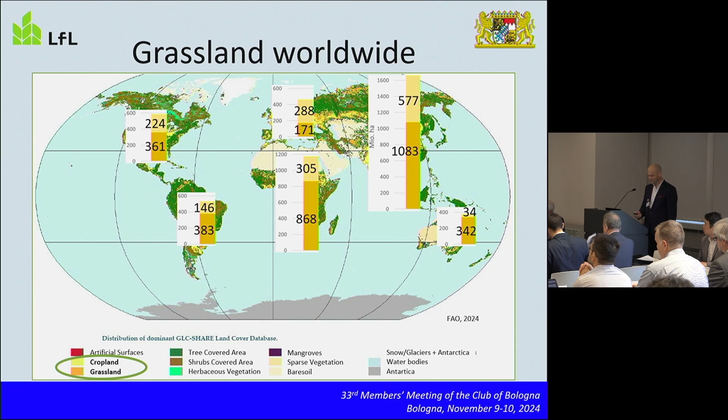So how was the development of grassland during the last two decades, since 2001? Generally, agricultural land area is shrinking. We have at the moment nearly 37% of agricultural land area on our planet, and it was shrinking during the last two decades by nearly 2%. When we look at cropland, we see it was the other way around - we gained cropland worldwide. We are up to one third of the agriculturally used area in the world being cropland.

Especially in Africa and also South America, we saw an area expansion due to deforestation, so cropland grew during the last two decades by more than 5%. And what happened to grassland? Well, it declined, it was shrinking during the last two decades. At the moment we are only at 67% of grassland. I've always got in my mind the number of 70% of the land area being grassland, so we are already going down by minus 3.5% during the last two decades.

There is also an area on the cropland that we manage grassland-like: temporary meadows and pastures. That area is quite high, 8.7% of the cropland, but it was shrinking during the last two decades by minus 3%, mainly in Northern America, Europe, and Asia. So we're driving out these temporary meadows and pastures from the cropland.

If we calculate the grassland area together with this temporary grassland-like area, we come up to three-quarters of the agriculturally used land in the world that is grassland-like. So it's actually the biggest crop that we use on our planet.

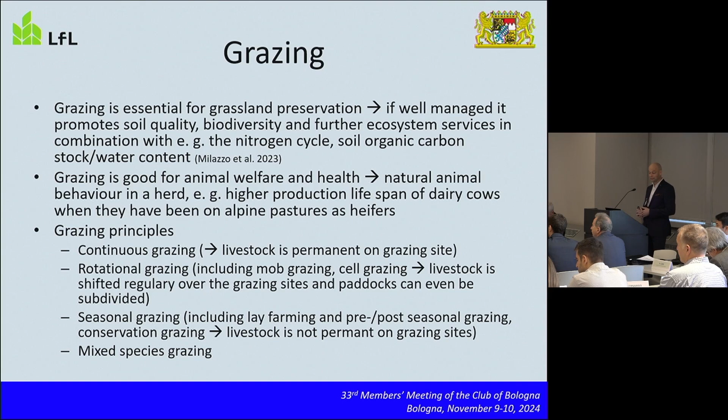Besides that, there is some seasonal grazing. I've already mentioned that there are times when grass doesn't grow, but it also includes lay farming or pre-seasonal grazing, and post-seasonal grazing or conservation grazing, so the livestock is also not permanent on the grazing sites. What we can also do is mixed species grazing, using horses, cattle, sheep, and so on. They use the grass sward in a different way, and that brings up more heterogeneity and more biodiversity.

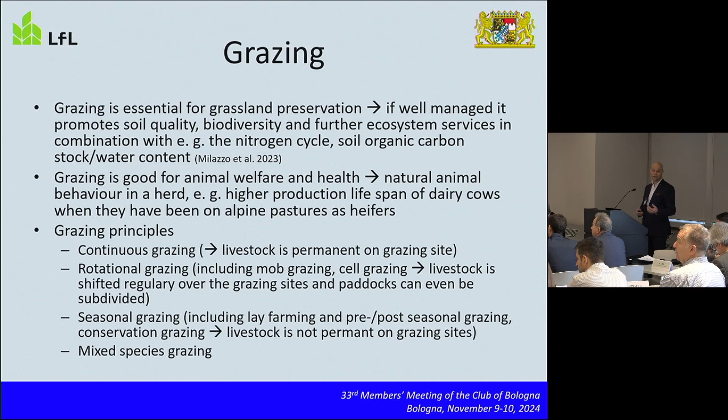What about data in grazing? Most of it is manual recording up to date. To measure the growth, the regrowth, and also the residuals after grazing, we have to go out there and do it by hand. There's not that much automated yet. We use a plate meter, but you still have to walk over the area. The management itself is also most of the times without any digital assistance, and no decision support systems are in place here. There are only local solutions used by farmers, but most of it is really manual. Farm management information systems are totally missing when it comes to grazing.

Worldwide, I would say. A few systems are already in use. We have some livestock tracking systems and geofencing systems like from Norway or Austria, but that's on the market somewhere, not even in use in Central Europe, for example. There is hardly any further data like on animal behavior or estrus detection like farmers are used to in the barn. They have a lot of sensors in the barn, but they cannot use it on the pasture at the moment. So when they go out on the pasture, it's more or less a black box for the farmer, and he doesn't know what the cattle are eating and so on.

I think what's changing the game is the virtual fencing systems that are coming into the market right now. We have four companies, NoFence, eShepherd, Vence, and Halter, that are producing these systems and have them on the market already. There are more than 250,000 systems already on cattle in practical farming, and most of them are suited for cattle, but NoFence is also for sheep and goats, they say. I think this is really a game changer when it comes to grazing, and we will find a lot of new ways of grazing in future, in my opinion.

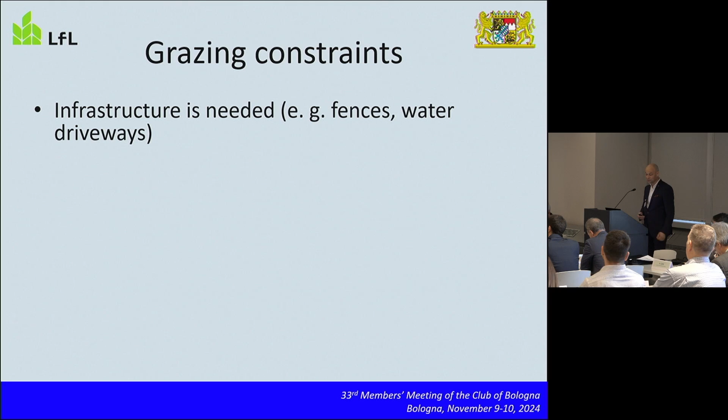What are constraints in grazing? Well, of course, first of all, you need the infrastructure. You need a fence, you need water troughs, you need driveways for your cattle. So that's an investment before you start.

Then, of course, you have the seasonal differences in growth and also quality of your sward. That means when you feed a dairy cow, your daily milk yield will change with the grass growth and the grass quality, and even your milk bulk contents will change. The feed intake of the animal is unknown to the farmer, so he doesn't know what the dairy cow was eating out there on the grassland. He doesn't know, do I have to supplement the cow in the barn? Is concentrate enough, or do I need even some more feed stuff? That's a really big thing where the farmer has to have good skills in order to get it right.

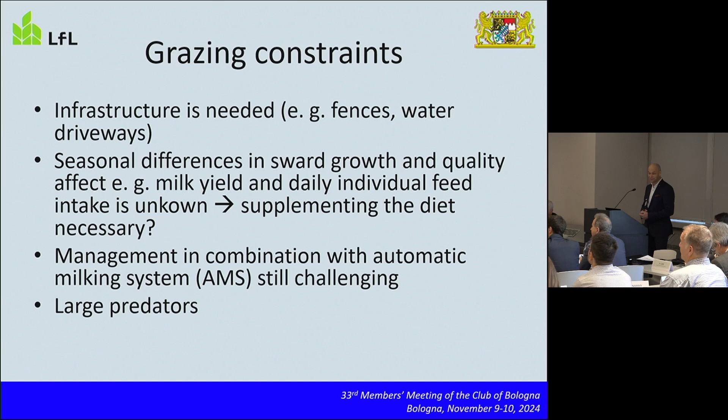We also have a lot of automatic milking systems out in the dairy farms, and still it is quite challenging, this combination of grazing and automatic milking systems. We have other problems like with large predators. That's a big topic at the moment in Europe, that we have the wolf back, and that threatens our grazing animals.

And of course, there is overgrazing all around the world on certain spots, and this leads to a loss of grassland, to a loss of biodiversity, and also to higher greenhouse gas emissions, like the situation we have in Mongolia, where they overgraze their land, and then the permafrost starts thawing, and methane is going out into the atmosphere. So this was about grazing.

Next, I would like to show some things about harvesting. The first thing on grassland is that we have not only one harvest, we have several harvests through a year. So 1st, 2nd, 3rd, and 4th cut, for example. And we can use it in different ways. We either use it as fresh biomass, directly fed to the animals, but most of the time we conserve it as silage or hay, and all in between. So there are different things between silage and hay you can actually make out of grass.

And it can also be combined, harvesting grassland sites and grazing them at certain times. So it's a big, differentiated use of this grassland. I just want to show here one example of a farmer. In the first cut, he says, well, I need this grass silage for the winter, so I bring it into my bunker silo.

So I do the wildlife rescue measures with a drone and a thermal camera. Then I come with my disc mower for mowing. Maybe I have to ted depending on the weather conditions, but then there is definitely the rotary rake to swath it. And I use the forage harvester for harvesting. So that would be the first cut.

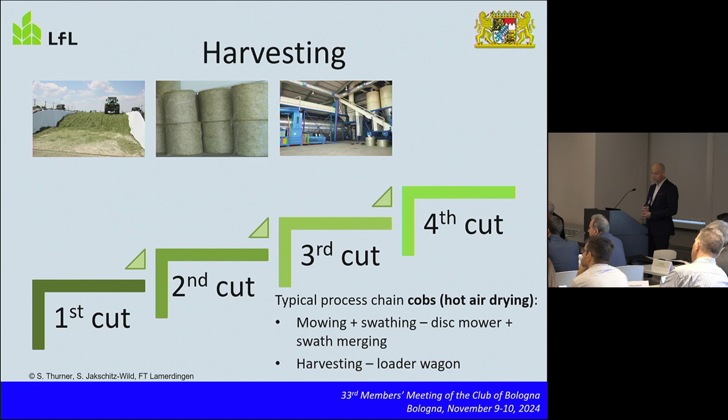And then in the third cut, he's happy to be in a region where there is a hot air drying plant. He produces cobs more as a concentrate feed also. The contractor comes in with a mowing and swathing device that does both together, and then he harvests with a loader wagon. And in the fourth cut, he says, well, I will do post-grazing. So I send out my animals to eat what's grown in the autumn.

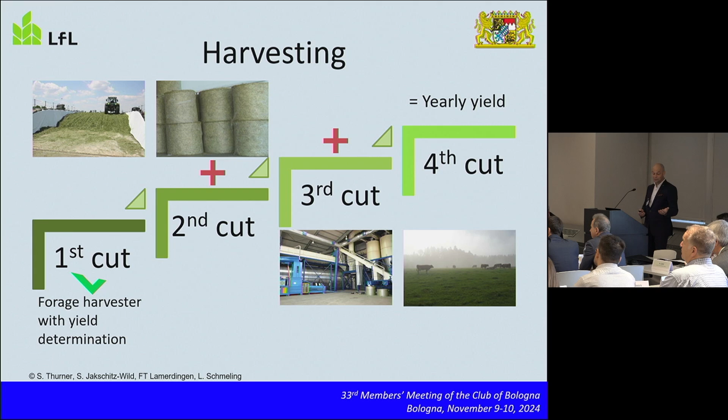But how is he managing this grassland now? He doesn't know what the yield actually is in each cut, and the final goal is to know the yearly yield on my grassland. So he has to sum up all these cuts. In the first cut, he has the forage harvester, there is yield determination available for it, so that's not a problem. In the second cut, the problem already starts, so he can't weigh each bale.

There are some techniques on the market where you get the bales weighed directly while you make them, but it's not very widespread. In the third cut, it's again not a problem because at the drying plant there's a cart scale, so he gets the weight of what he was producing. And in the fourth cut, again, no technique, so he has to run around with his plate meter maybe in order to get some numbers.

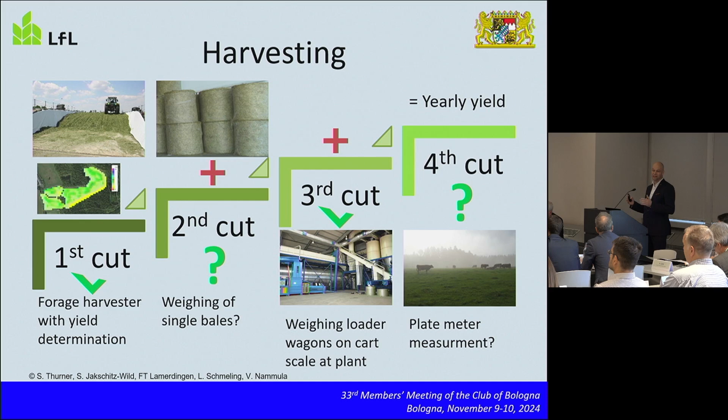And when it comes to site-specific management, it's only in the first cut where he is actually able to produce a site-specific yield map. With all the other things, he is only getting a big number for one plot if it's going well. So you see there is all sorts of usage on grassland, and we always need this yearly yield. That's really our goal, in dry matter yield, not fresh mass yield.

And we've tested some of the forage harvesters. The 4 companies named here, John Deere, Claas, CNH, and also Krone, with their different models of near-infrared spectrometer and different software versions on 10 Bavarian farms, as you see on the left side of the slide. And what we found is that this technique, yield determination on self-propelled forage harvesters, is already very well developed.

We've compared here wagon loads that were calculated by the forage harvester and that were calculated from our reference data, and you can see that it's really nearly matching. So I'm very happy with that figure. It's a very good way to determine your yield on the grassland. And we've also compared it on a plot scale, and we found a concordance correlation coefficient of 0.78, which is quite good. So here you can really say that we are on track.

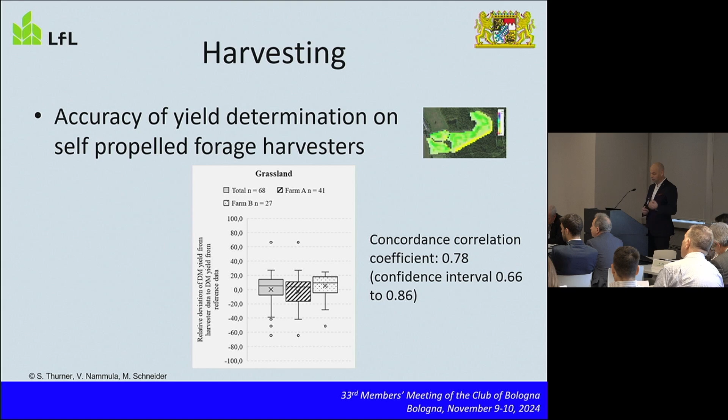There are some that work quite well already. There are some that need some improvement, or well, maybe it's always not so easy with the near-infrared spectrometers on a forage harvester really to predict what's in there, because you only see a part of the material flow and so on.

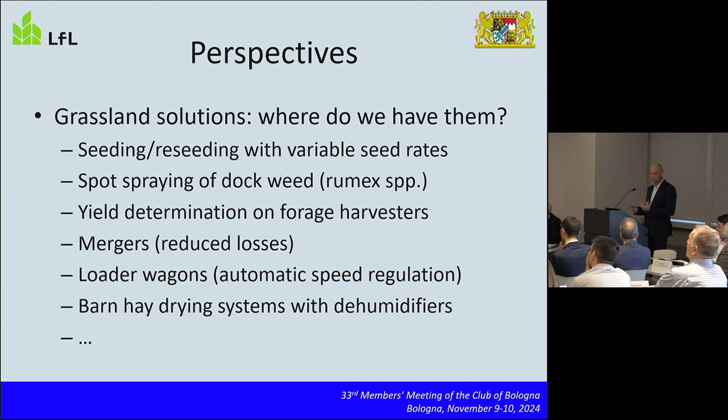Then we have some things new on the merger side for reducing losses. We also have on the loader wagons some good ideas, for example, automatic speed regulation for picking up the material. Then we have these nice barn hay drying systems with dehumidifiers that really conserve our quality on grassland. So there are things that are going well, I would say, but there are also things which I can't believe that they're still not in place.

And when we start with the farm management information systems, you have to really say, well, we're not doing a good job there at the moment. Most of the time, the farmer has to note down his yield of the plot on the harvester, or he might get, if he's got a good contractor, a sheet of paper with a nice colorful picture, but that's it. So when he's entering it into his farm management system, he will do this manually again.

So there are already solutions that can automate this, but we found with all these 4 companies we work together with, it's not working. So the farmer would never be able to get this data from his contractor to his farm management system in a way he wants it and can actually use it. Yes. And that's incredible to me, that we offer systems to the farmer that are not working, and especially not working for grassland.

And of course, yield is the one thing, but then we come to slurry application. We could also use these farm management systems there, and then we've got this big gap, the silage stack, and also the slurry storage, where we don't have any data. So we have the ones that care about the animals inside the barn, and we have the ones that care about the grassland outside, but we don't have these people that bring it together.

So that's also a big lack, and the silage stack is definitely one part on a farm where we have huge losses. They start at 10%, and if it's not well managed, they go up to 20%, even more than a third. So especially in those biogas plants we have in Europe, they lose most of the time more than 20% of the material they brought into the silage stack, and they can't use it for producing energy.

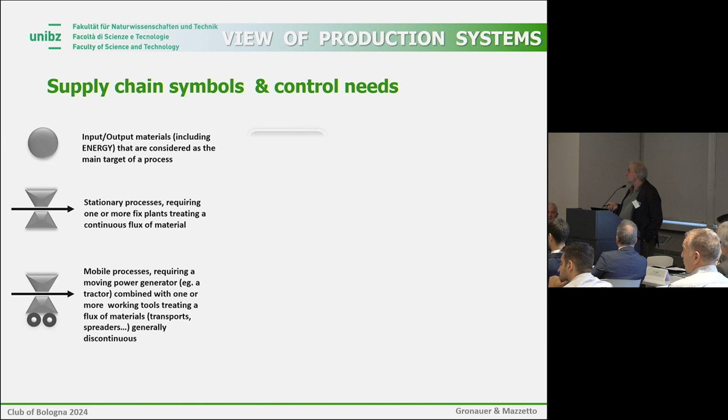When we speak of farm management systems, we speak of a variety of technologies: sensors, identification systems - not so frequently mentioned, but strictly necessary - actuators, positioning systems, and ICT solutions, the so-called software, to manage data and information.

If we want to analyze the way of producing something, the enterprise, in this scheme we have balls indicating materials, primary input, intermediate or final output. This scheme is derived from the Forrester representation of the 70s - quite old, not much used now - with the distinction of a stationary user point or mobile user point, so machines or plants in our case.

It's interesting to see how, in principle, this technology can be distributed among the necessity of monitoring materials, monitoring machines, and the related technologies. Keep in mind, any technology should then be integrated into the farm information system. That's the point - how to integrate all of them.

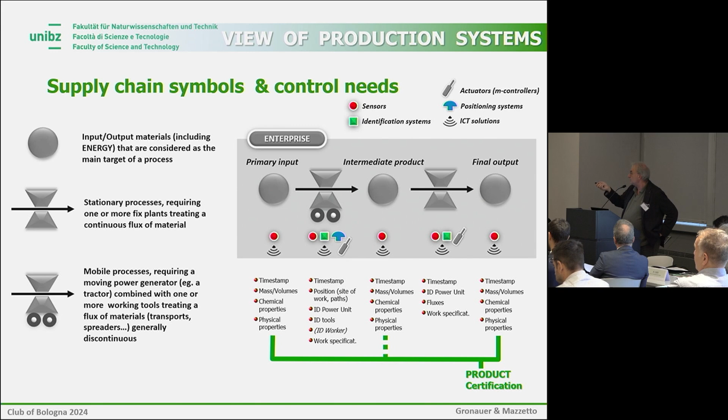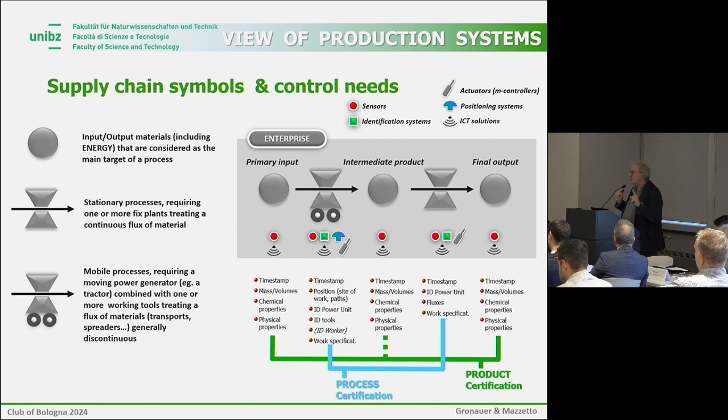This is just an example of what we could register, but what's important is that if we focus on materials, we're speaking about product certification. When we focus on machines, we have the focus on process certification, but both should nowadays be considered, also in forage production, in the view of our enterprise.

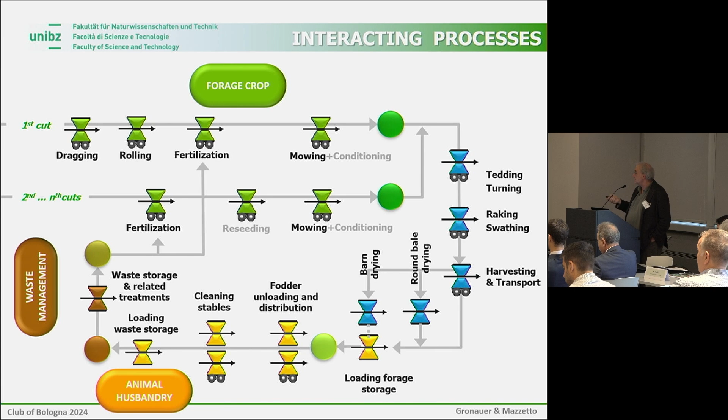So this is just an example of introducing also the processes with the related colors. You see that the integration is quite complex, and what we call haymaking lines implies several interactions with forage crop, animal husbandry, and everything is in the middle.

Some implications must interact and must consider what our targets are about quality of products, but keeping in mind that we should also look at the work organization and the productivity of our technologies. In this context, it's quite difficult.

So having such a confusing situation, where one process is affecting another one and so on, it's very hard to expect a radical innovation - a revolution is very hard to be expected here. Better to focus on incremental innovation, because it's favored and simpler to apply.

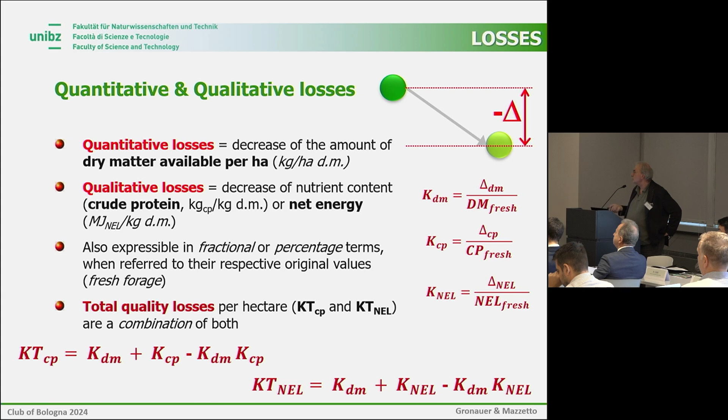So we have some indexes. What is interesting is that if we speak about total quality losses, we have a composition given by the formula, and this composition can lead to terrible numbers.

This is an example, just a list of possible losses, also tested in the field. We can reach up to 30% of dry matter. This is quantitative losses about hay production, sorry, in this case with conventional haymaking.

But if we analyze, for example, a production of 5 tons per hectare of alfalfa with 22% protein at the fresh forage stage, assuming 25% and 20% losses respectively for dry matter and crude protein, we arrive at a total loss of more than 440 kilograms of crude protein per hectare, corresponding approximately to 2 tons of concentrate per hectare. So the numbers are terrible, and this is a great problem.

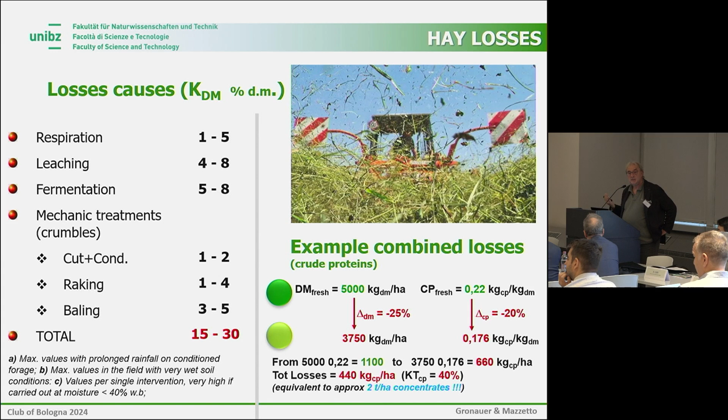Losses could be analyzed also through twin models. Nowadays, another technology available today is the implementation of twin models. Working on useful databases and so on, we can also simulate what losses we can expect according to specific weather conditions. This is an experiment we carried out on alfalfa, which was affected by rainfall.

2-3 hours after cutting in the mountain regions. The blue line is moisture, the trend of moisture actually measured with continuous sampling of the product, and the red line is the simulation. Many of these data were based on experience of Rotz from the States and other experiences we carried out in the north of Italy. The three points are the validation checks.

So we measure actually the losses in the field. It's a quite complicated task because we have to distinguish the steps, we have to recover everything in the field. It's not easy. So I think the error is not trivial here, but the results were very satisfying. So we can imagine having a situation of losses to be simulated also through these models.

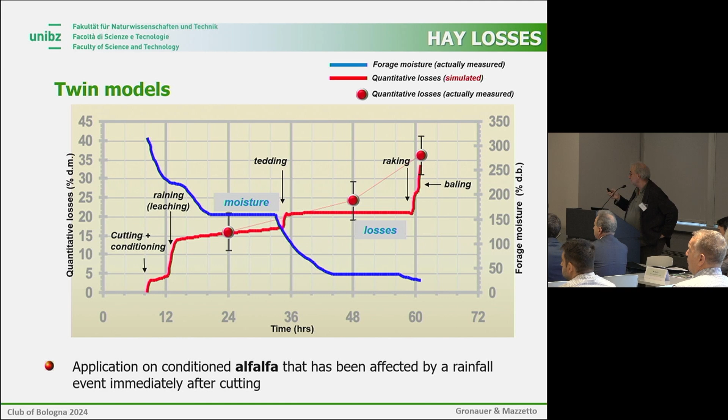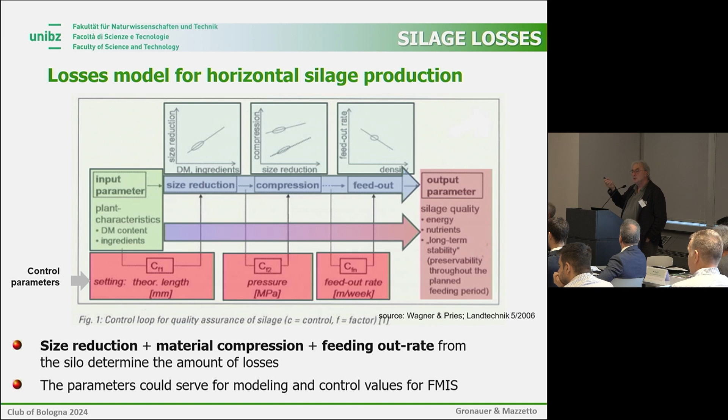About silage, there is the possibility, according to the type of machine used during the harvest, to have expectations of the losses by controlling, for example, the intensity of the cut, the size reduction, the compression we can provide into the silo, and also considering the feed-out rate, the uploading rate from the silo. There are experiences mentioning that these aspects, if well conducted, could be useful to keep losses in silage under control.

So some quick mention of technologies, old also in this case, but still applied. Solar barn drying. This is the first one I want to mention because it's not new, obviously, but it's one of the most important changes of paradigm introduced to increase the quality of hay forage production. There are obviously many problems: investment and energy consumption. These are justified only if coupled with an air solar collector installed on the roof.

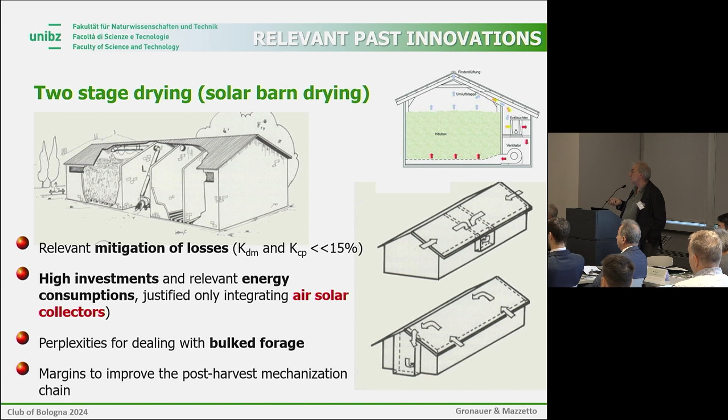There are even perplexities in this solution for dealing with bulk forage. The farmer generally prefers packed forage. But there is still margin to improve the post-harvest mechanization chain. A reasonable compromise could be round bale drying.

It seems there is increasing interest again towards this type of solution. In this case, the mitigation of losses is lower because we lose more. There is, in addition, also the risk of non-homogeneous drying. They are suitable just for bales produced in a fixed chamber, not a variable chamber.

Moderate investment and additional post-drying work is required. But they are appreciated, even while we are working on baling.

I want to mention for both of these technologies the need to also introduce, and this is a call to all the researchers here present, we have to start dealing with BIM tools, the so-called building information models. These are methods for optimizing the planning, implementation, and management of construction with the help of IT infrastructures. It is quite used in other building sectors. We have to introduce this type of tool also in agriculture because they easily integrate the function of designing and controlling any type of plant into the farm management information system. I think we have a lot of work to do here, very fruitful also for introducing technologies.

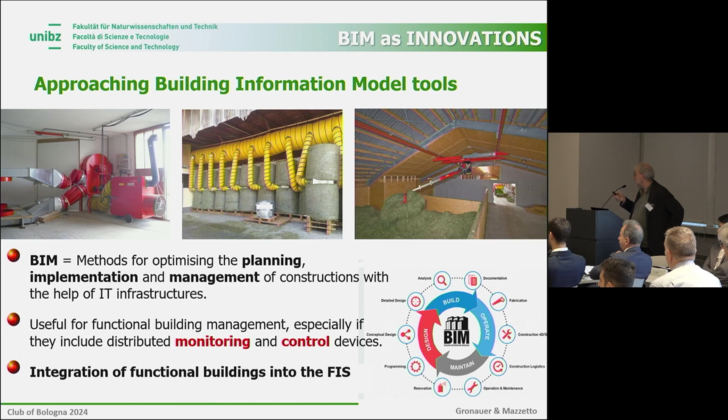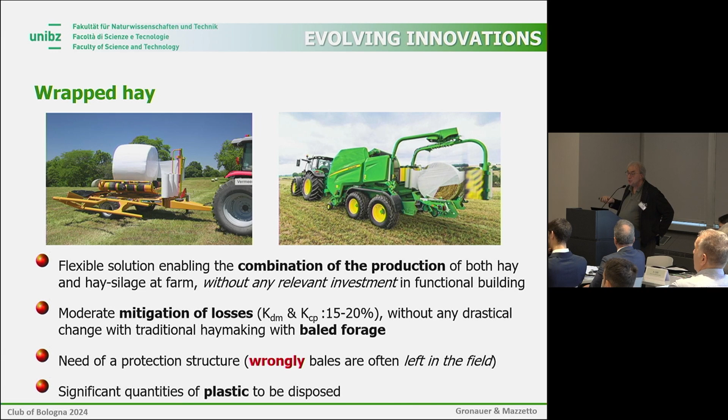Wrap bale is also an interesting evolution, not new as well, but evolving, for example, in combination with the baler. There are some mistakes in the use of this. For example, here in the north of Italy, they frequently leave the wrapped bale in the field. This is a disaster because it anyhow requires protection. One of the main problems connected to this solution is the enormous amount of plastic we are going to produce, and this is against the principle of environmental protection.

Digitalization of large big balers. We also have two awards in this edition of EIMA. Generally speaking, square bales should be more favored by contractors compared with round bales, just for transport and storage advantages. But at farm level, round bales are still preferred. So the two awards are related to round bales, if I remember well.

What is interesting here, as an incremental solution, is the introduction of digital tools. Sensors, generally connected to ISOBUS, can enable regulated differentiated pressure, preventing work on unsuitable materials. Not all models introduce moisture measurement, but some are considering this aspect, correctly dosing additives to improve quality and shelf life of the forage. There is large improvement in this step too, but there's still the problem of connecting this information to the farm information system, as already mentioned by Turner.

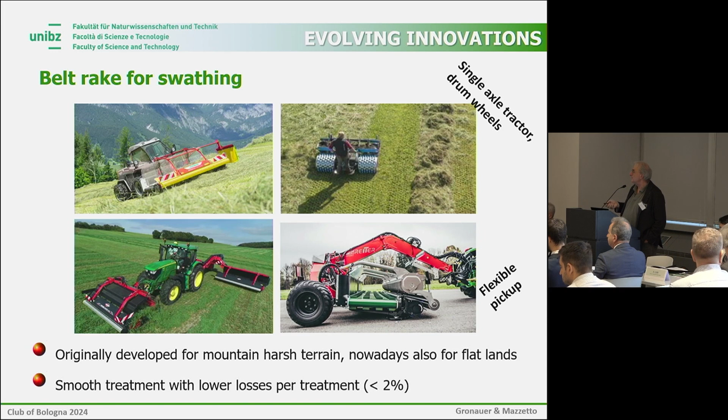You see some solutions implemented for the mountain region - heroic farming forage. We have different solutions for forage production in harsh environments. They were developed recently and in my region are quite common. The cost is sustainable, but risk and social sustainability must always be deeply evaluated. It's not so simple, even having this machine at our disposal.

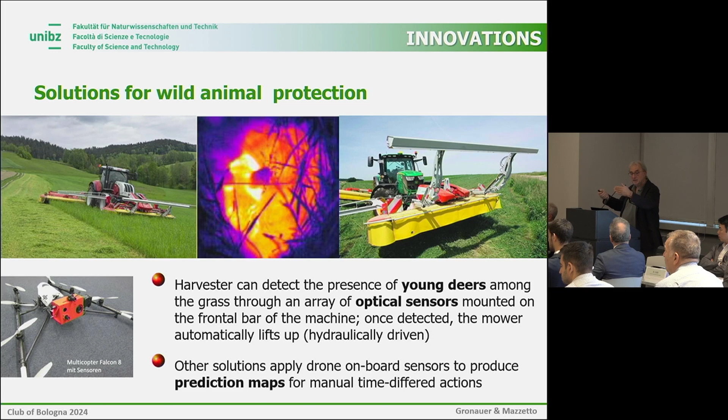Other solutions are related to animal protection. This is a solution produced by Pöttinger, detecting with an optical sensor the presence of an animal before cutting and stopping the machine if an animal is present. There are also studies about insect protection being developed. I am more mitigated toward this topic, but it was mentioned yesterday when we spoke about regenerative agriculture.

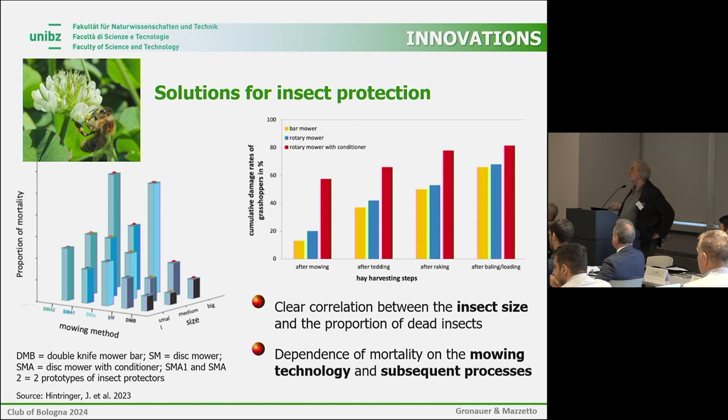So, robotics, just very quickly, and I'm going to finish. But it's time for a coffee for Paolo, I understand.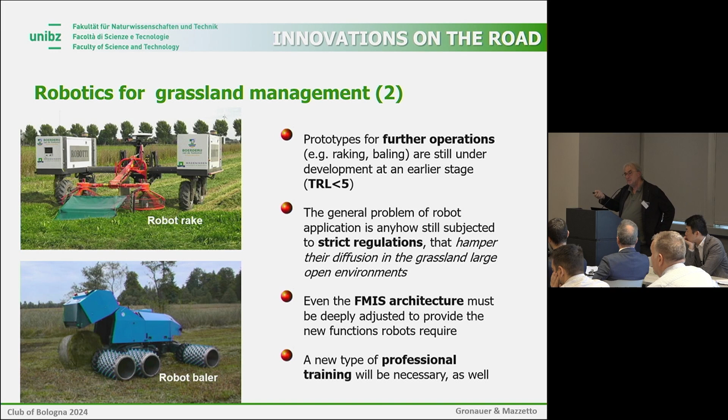There are other grassland management applications, for example a robot rake, a robot baler - the robot baler is Chinese, with a very low TRL, that are going to be developed. But the problem of robots in our sector is facing the strict regulations their use requires. These regulations are stricter for grassland management because we usually have to deal with a very large portion of land. So we have to wait for the evolution of the regulations and safety measures, and obviously robots will also require further adaptation to the farm information system, with new requirements and new tools to be introduced.

So the conclusion - are we ready for a smart forage system? This is a provocation; Smart Forage 5.0 is just a brand. Yes, but we first have to distinguish between intensive and extensive agriculture - intensive, for example, what we have in the Po Valley, extensive what we have in the mountains. Anyhow, we have some common objectives that could be followed with different strategies, obviously.

Here there is fodder quality, the selection of optimal cutting time, the necessity of reseeding, preferably following a site-specific approach to maintain always the right vitality in the production of the grassland, to introduce more monitoring solutions to satisfy the aims I mentioned, and also having a look at robot development, as I just told.

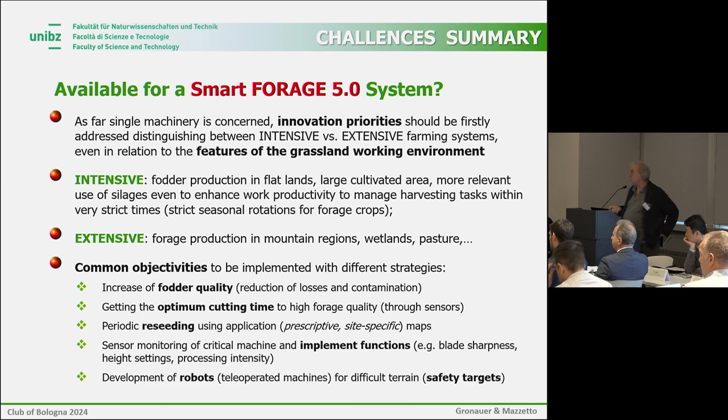Yes, but, so, okay, we could be ready. Obviously, there are some problems. If we want to search for radical innovations, we have to approach the problem considering all the sectors I mentioned: crop, husbandry, and waste management. We cannot omit this general approach.

And then we have to study how to approach the actual and feasible introduction of the farm management information system. Keep attention that here I don't want to speak about software, it's not just a problem of software. Here we are speaking about information technology infrastructure. It's something more complex because we have to integrate a lot of components in this task. And in short, these components are related to monitoring and controlling activity.

Obviously, this adaptation must consider safety and environmental protection with a certification and traceability approach. This is not anymore postponable. And at the end, I would say, if you really want to speak about a radical innovation in the sector, also keeping the conclusion of Turner, we should identify new international standards for permitting this transfer of information and this integrating approach among components within an information system, possibly with analytical functions.

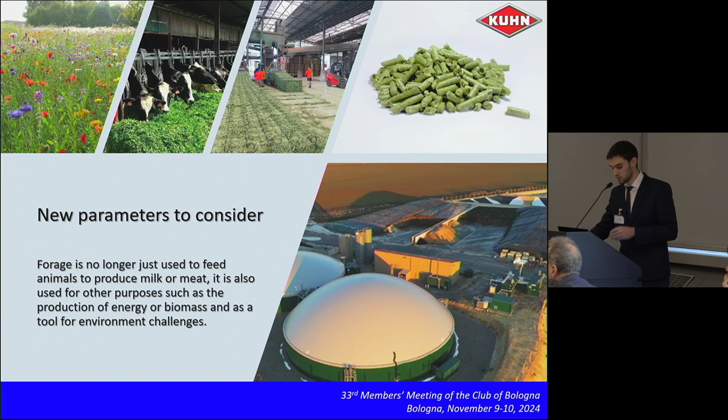Last parameter is farm sizes are increasing. So as we said in the previous presentation, the farmland is more or less the same through the years, but we can say that there are less and less farmers in the world. Young people don't want to be farmers. So it's really, really difficult to find young people to farm. So there is the same quantity of arable land, but less farmers.

So farm sizes are bigger and bigger. So we need to have also bigger machines to harvest this quantity of crop. But at the same time, as I said, there are less and less people, and also less and less skilled people to work with our machines. So we have to adapt the material to not only be efficient, but also bring some comfort to the driver and to have an intuitive machine. That's also an important point of our development.

So we have seen different parameters, new parameters in this world. So how do these parameters impact the development of a machine? As we said, there is more and more field to work, and farmers are looking to increase their capacity, to increase their output. So it's really important for us to develop and design a big machine with a large working width. So that's the first point, but also more capacity.

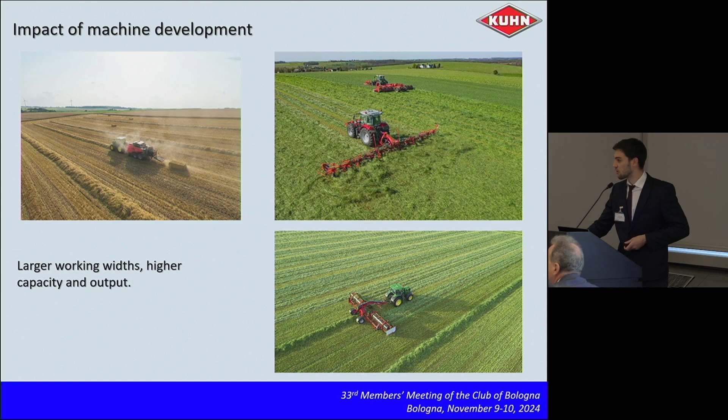So it's a real challenge for us to create these big machines because you need to create and design specific components, specific parts, but at the same time you also have to have a compact transport position. So it's a compromise between the working width and the transport position. So it's a real challenge for engineers to create such machines.

Technology is also important. We are developing new technology to face and to meet the needs of our customers. So here we have the example of our large square balers coming from the Geldrop factory in the Netherlands. There is a new, patented technology with a dual piston system, and this system helps the farmer to reduce fuel consumption.

Because we divided the piston movement, we are able to use a smaller tractor, so we will save fuel and then save money, of course. And this system also helps the farmer to create bales which are 25% denser compared to a normal system with a single piston.

So we have seen large machines with big output, technology, but we also need to bring new concepts. We have seen in the previous presentation the development of a merger machine. So here it's a reality. Kuhn is a pioneer in the development of this type of machine. We started this type of machine 20 years ago in the USA for alfalfa.

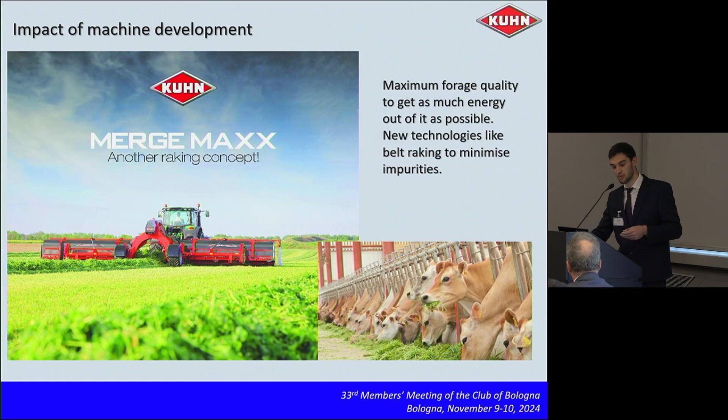We talked about automatism and automation. That's also the reality today: to help farmers to control data, to bring data, and to have more comfort to pilot the machine. So here it's a concrete case. You may have seen it in the showroom. This baler has been awarded this year at the EIMA show, and we bring to the farmer the possibility to have an automatic baler. It means that this baler, the VB 7100 series, integrates different technologies.

First, section control. It's the first time in the world that a baler has this technology. Section control helps to automatically lift and lower the pickup at the headland. So it helps the farmer or the driver to gain in comfort. And these balers also have the TIM function, or the TIM system.

So the baler will pilot the tractor. It's not the tractor which pilots the baler. It's the baler which pilots the tractor. So the baler is able to say to the tractor, now you need to stop, you need to open the gate of the baler, and then you have to restart the work.

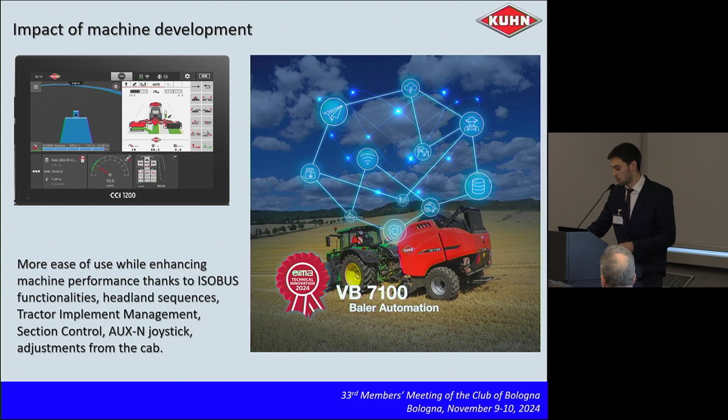Agriculture 4.0. We spoke about it in the previous presentation. More and more farmers want to collect data from the field. They want to know the yield of the field and the production. So we are developing different software, and here you can see it's also the case with the same baler as before. We are able to collect the data: where the bale is located in the field, what is the weight of the bale, what is the moisture rate of the bale, and thanks to this system, we are also able to transfer all the data from the machine to the computer.

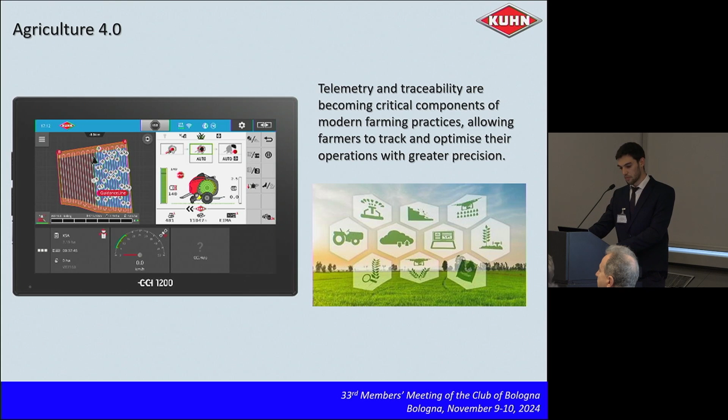So the farmers know in the field what the yield is live, but also in the office. And then in the office, he is able to analyze and to merge all the data from his fields. It's also important for contractors. They are able to put the name of the customer and the field name. So we are able to say, in this field I have this yield, in this field I have this yield, and it's really important regarding this point. So that's for the impact of our development.

Now regarding the future, of course, we will continue to embed technology, we cannot come back with less technology. Even in small machines: we have seen big machines with a large output, but we need also to consider small and basic machines, because sometimes fields are too small to work with big machines. Small farms with small and basic machines will also request a lot of technology to gain productivity and to gain comfort.

So you can also say that we will bring more automation, more automatism in our machines, but also more decision support systems. That's really important for the farmers, that the machine is able to help him to make decisions.

Of course, reduce energy consumption. I told you that we are still working on it with some examples, but more and more it will be mandatory for us as a manufacturer to produce low power consumption machines because of the legislation, but also because of the social pressure. So we need to consider this parameter and to go further regarding this point.

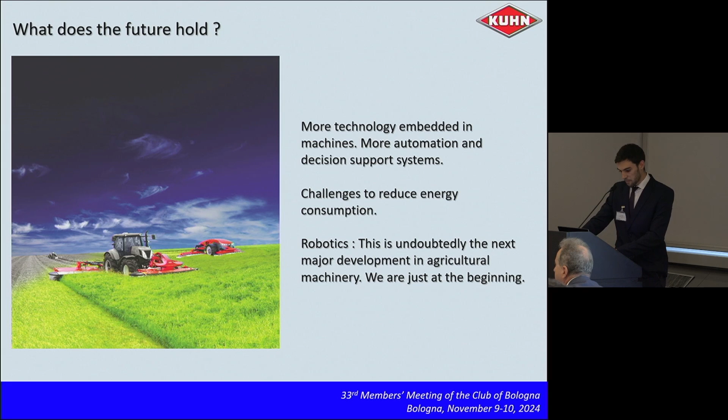So to conclude this presentation, we can say that of course technology will be the future, and the future of mechanization lies in smart forage management. That's a true point, and that's the reality.

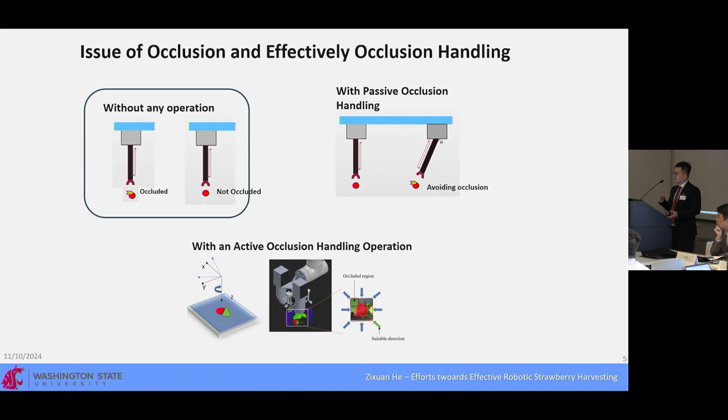The final one is the method I applied in my PhD dissertation: robotic harvesting with active occlusion handling. I used a fan system to remove the leaf, vine, or any kind of occlusion over the target strawberry, and then pick the fruit. It consists of three parts: the first is strawberry detection; following that, I use a machine vision system to conduct the picking decision based on visual input; and finally, based on different occlusions, I apply the robotic strawberry harvester.

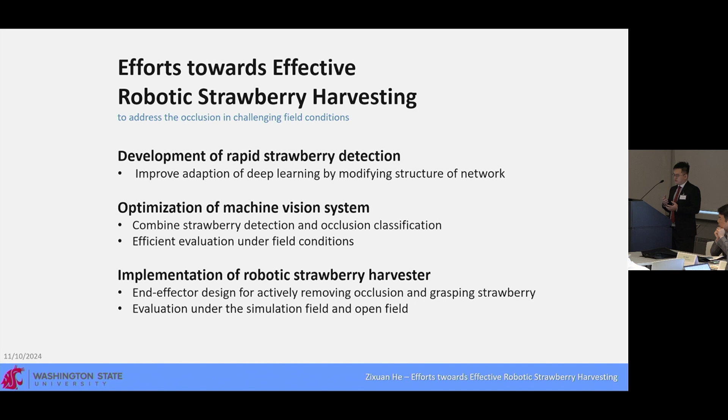The first part is related to using AI-based tools to conduct strawberry detection. We can see it as a function or formula: the input is a strawberry image, and the output is the strawberry location with a bounding box and a label name. For example, this is the mature strawberry, and this is the nearly mature or immature strawberry.

My work here is to modify this neural network to make it more suitable for the strawberry detection task. For example, this is YOLOv5, which stands for You Only Look Once. It is a very general AI tool for object detection.

The original task of this AI tool is applied to the COCO dataset, including 80 different classes. However, in this work, we don't need such a complex network structure. It means we could make it simpler to better fit strawberry detection, so I use a simplified module in YOLOv5 while maintaining the detection accuracy.

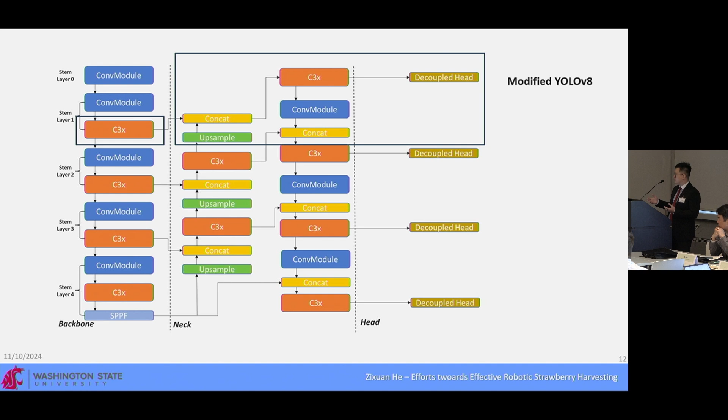It is also similar - I use a simplified structure in the neck module to make it more efficient.

After we have the ability to conduct detection, it's time to consider whether this method is really suitable for real robotic strawberry harvesting. We can see from the cropped strawberry images that they have different occlusion rates, meaning we might not be able to use the same picking method for them because of occlusion during harvesting.

I also wanted to use object detection for this step. However, my preliminary results showed that because there were too many similar features among different strawberry leaves, it would mislead the detection performance. In this situation, we need an additional recognition technique for occlusion classification or a picking decision to remove the occlusion, or we could try to avoid occlusion altogether.

This is the whole workflow of part 2, or objective 2. The first part is very similar to strawberry detection - we find its location, and then another AI classification network makes a decision label for each mature strawberry. This means we can decide whether a strawberry can be directly picked or whether it's occluded by another part and needs additional procedure.

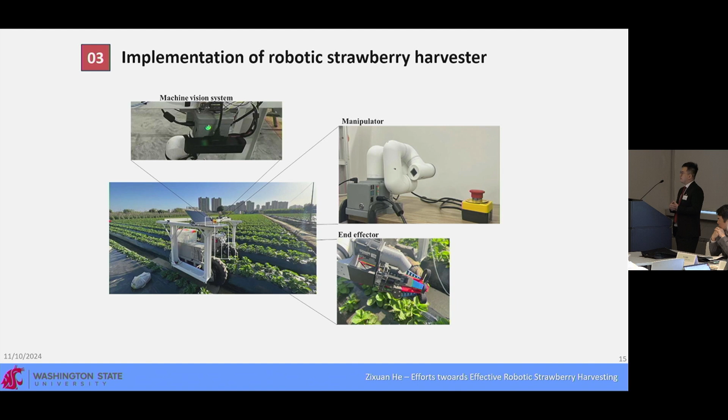After our machine vision system has this adaptation ability or decision ability regarding the strawberry canopy, it's time to conduct strawberry harvesting. My robot is composed of 3 main parts: the first is the machine vision system as I mentioned in the former two parts, then a commercial manipulator, and a self-designed end effector with a soft gripper and also a fan system.

The fan system is attached just above the gripper, equipped with a 12V DC motor and adjustable speed. There are 2 air tubes for direction choice, because sometimes due to attitude limitations, the manipulator couldn't adjust the angle or wind direction very smoothly.

Here are simulations of air flow on the strawberry, and a simplified control algorithm. I use another detection algorithm after this occluded strawberry - for example, the strawberry bounding box is separated into 9 grids. If grid 7 has occlusion, the wind direction will go through direction 7 to remove the occlusion. This involves controlling the attitude and the right angle to remove the occlusion.

And finally, I conduct my experiments in a commercial site. I just compare the result without the fan system. Although it is very difficult to compare them, because sometimes they have different occlusion rates, the final successful rate is improved by 15.8%, and the processing time, due to the new processing procedure we introduced, was increased by 5.69 seconds.

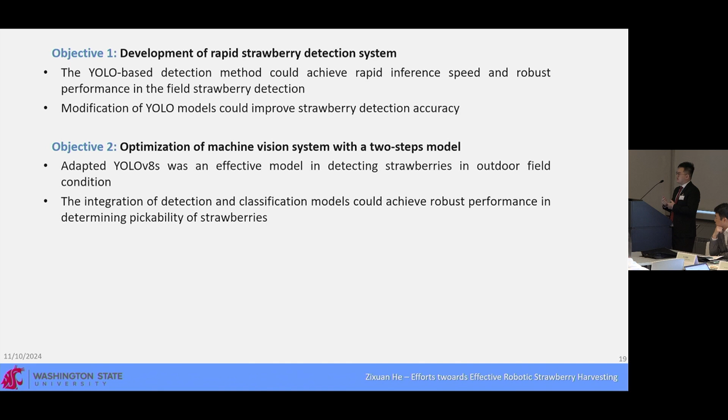Finally, let me do the conclusion. In objective 1, I modify the general AI tool to the strawberry AI tool, and in objective 2, I upgrade the machine vision system to let it have decision ability, and based on this decision ability, I apply the robotic harvester to have different actions according to the current strawberry harvesting field. So it is more like going from detection, visual sizing, to adaptation, and finally conducting the operation.

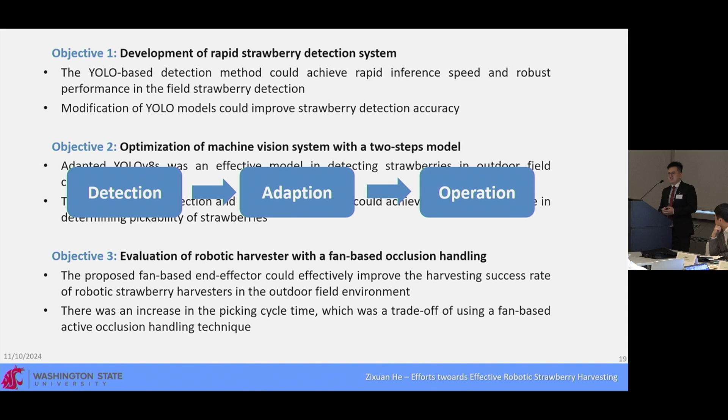So due to time limitations, I couldn't bring all the technical details. Thank you. I believe that's all for my presentation.

Thank you very much. I'm not sure that we have time for at least one question, but just one if it's really needed. Okay, just Professor Reinius, just the one. Speed of picking them compared to a good person who does it conventionally. The ratio. Is a machine as fast as one person can do?

No, I just want to say to you congratulations for the really nice work. Yeah, thank you so much. So yeah, and also maybe sometimes one arm is so slower, then we could apply multiple cooperation between the manipulators. That will kind of increase the efficiency greatly. Yes. Thank you again. Thank you very much.

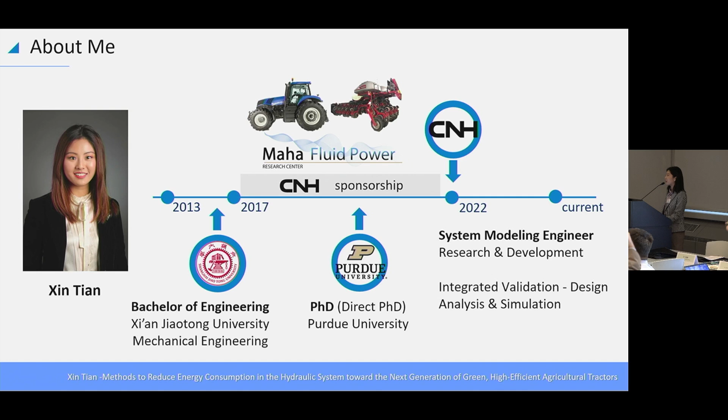And after graduation, I joined CNH and am currently employed as a system modeling engineer working R&D back in the USA. Let me start with the background and why we look into the hydraulic circuit and why we need to improve the efficiency of the hydraulic system. As we all know, global warming and climate change is gaining increasing public attention.

From a comparison between on-road vehicles, such as cars and trucks, compared to off-road vehicles, which includes agriculture, construction, forestry, earth moving, it has been pointed out that in the EU, for nitrogen oxide and PM10, on-road is producing 42 grams per kilowatt hour, while off-road vehicles is actually 46. For PM10, on-road is 2.5, while off-road is actually higher, at 5.5.

A lot of attention has been paid to increasing efficiency and reducing gas emissions for on-road vehicles. However, less has been paid to off-road, and that's actually because of their highly variable duty cycles. However, there are a lot of similarities in their design, for example engines and transmissions.

Because of the heavy-duty characteristics of off-road vehicles, hydraulic power is still playing a very key part in supplying different functions and achieving control. From one study conducted by Oak Ridge National Laboratory, together with the National Fluid Power Association, they concluded that on average, the industrial hydraulic system efficiency is 50%.

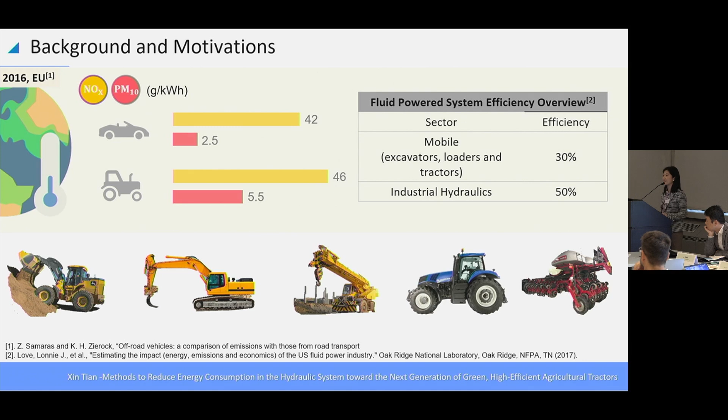Let's take the agricultural tractor and take a closer look at the challenges incorporated in this work. If we want to improve efficiency and come up with highly efficient and cost-effective solutions, a typical agricultural tractor hydraulic circuit is supplying multiple different functions, including traveling, service, steering, braking, power beyond, and other auxiliary hydraulic functions. To have better performance and optimize component sizing, a foundational step is actually to understand where the power is lost, to characterize the power loss.

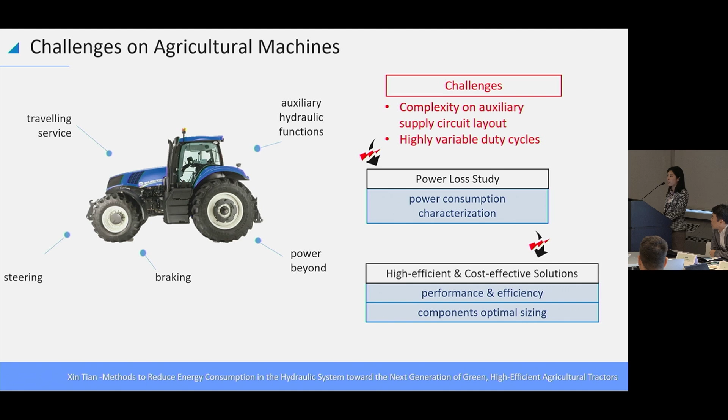However, that's not an easy job to do. The challenge here is the auxiliary supply circuit from the tractor to implements are very complex. Not to mention their highly variable duty cycles, the ground condition, what work you're trying to perform—they all affect where the power is lost and how the power is distributed.

Moreover, tractor alone is not enough. What the tractor is trying to do is give the pulling force to conduct implements, cultivating, and other work in the fields. From a fully instrumented tractor and planter, and after performing experimental tests in Purdue Farm, what my team has found is that system efficiency drops to only 18%, which is much lower than the 30% expected when they're put together.

This challenge requires better integration between the tractor and implements to solve this inefficiency. To give a brief overview, this inefficiency is actually because of the duplication in control valve designs in both the tractor and implements.

A third challenge: facing the trend of electromobility to achieve carbon neutrality and more climate-friendly machinery, the electromobility trend also applies here for off-road vehicles. If you look at the spectrum of current technology versus full electric, we might agree that we are here—we do have some solenoid controlled valves.

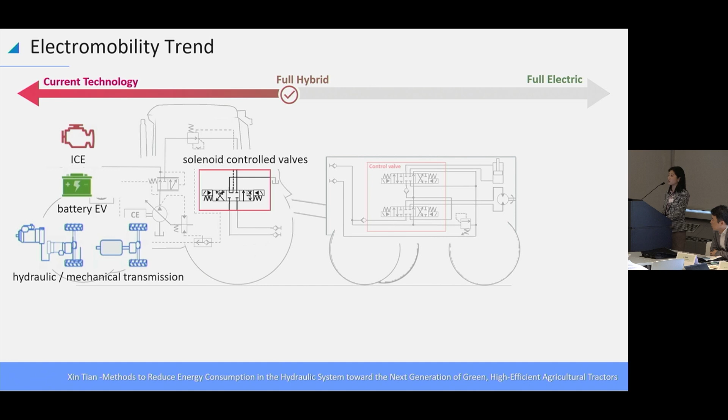However, a doable next step would be going further toward hybrid—what we can think of is maybe reducing the engine and attaching more batteries. Another idea is to electrify certain auxiliary functions for linear work and rotary work. But then the question is which function to electrify?

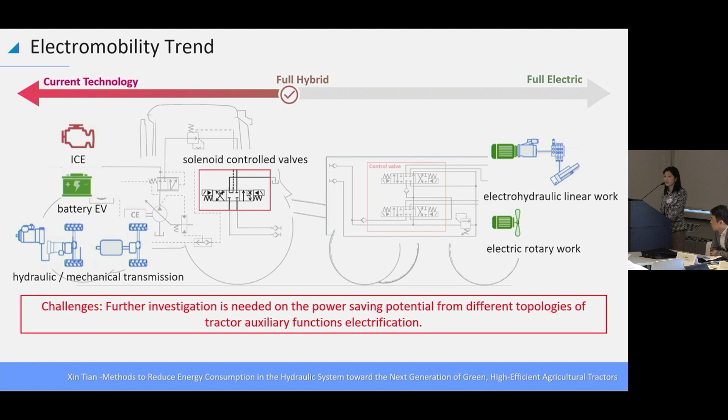That's the third challenge: further investigation is needed on the power saving potential from different topologies of tractor auxiliary function electrification. To target these three different challenges, this research tackles all of them, having one objective.

The objective is to propose and experimentally demonstrate solutions, and to provide insights into partial electrification potential on the tractor high pressure hydraulic circuit. The goal here is to reduce fuel consumption and possibly lower the cost of ownership, especially for OEMs, for the next generation of green, high-efficiency agricultural tractors.

The reference machine here, thanks to CNH sponsorship, is their New Holland agricultural high-horsepower tractor, coupled with a Case IH 16-row planter.

The approach taken here is a combination of experiments and simulation. We're going to build a basic model foundation of the system, and then validate the model. After we trust the model, we're going to use it to propose new solutions. After solution proposal, we want to implement the solution in the reference machine and see if it's promising. If not, or if it needs more study and improvement, we do evaluation and iteration to achieve further improvements.

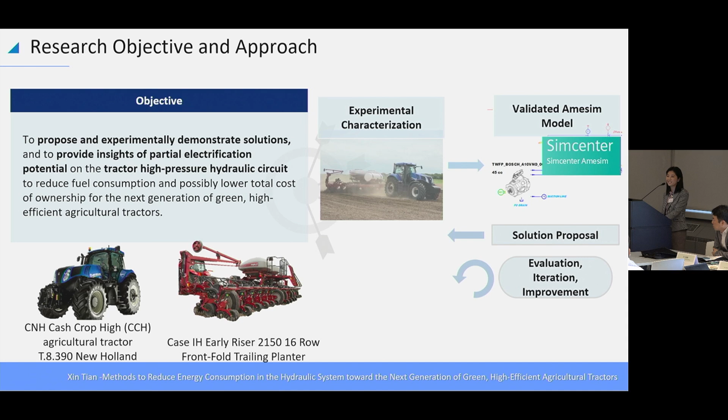Briefly talking about the research in more detail: a system model has been developed for both the tractor and planter circuit. Supplies from the engine include a hydraulic variable displacement pump. It involves tractor electronic hydraulic remote control valves, connected to the four main functions in the planter: bulk fill fan, fertilizer, vacuum, and alternator. This is just an overview to give a brief flavor and peek of the modeling approach.

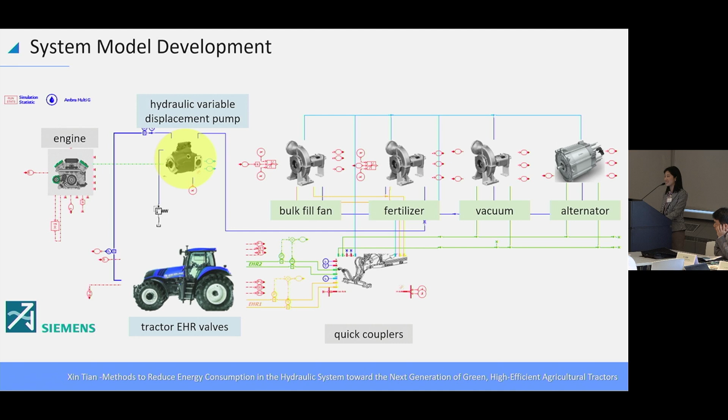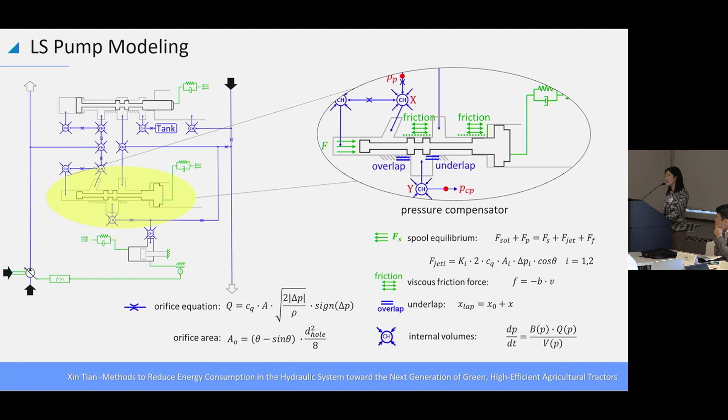Since the pump is the core and the heart of the hydraulic system, correct modeling of this is very important to capture the right performance of the system overall. I'd like to show dynamic validation results of this pump model.

What we're looking at is a flow compensator stroking dynamic test, comparing experiments and simulation. The idea is that load pressure, standby pressure, and also the dynamic recovery time all have a very high percentage of agreement between simulation and experiments, which gives us more confidence to use this pump to perform system-level simulation.

Talking about system-level simulation, I'd like to show another comparison between modeling and experiments to demonstrate the confidence and trustworthiness of the model that has been developed. What we're looking at is a comparison for four main information points, for both pressure and flow rates, of pump delivery and the functions. This is only one single remote test result comparison.

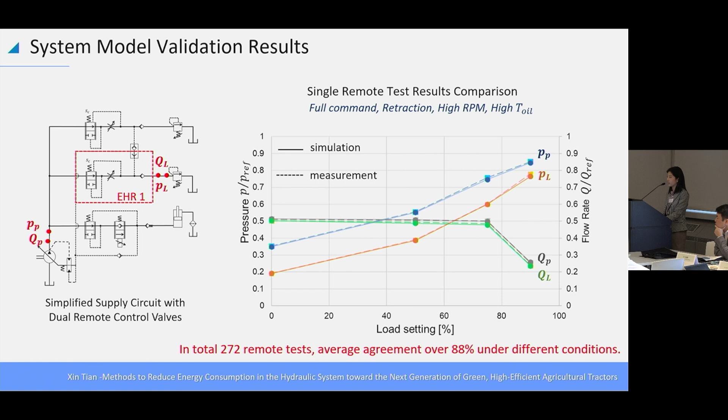However, there are in total 272 different remote tests considering different oil temperature, different engine speed, and different flow commands. In combination, average agreement is over 88% under all different conditions, which makes the model very trustworthy and satisfactory to be carried with to propose new solutions.

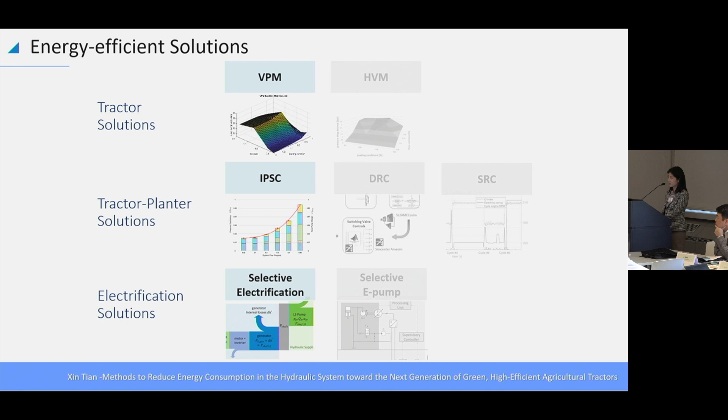Talking about solutions, there are 7 different solutions in total that have been proposed, targeting tractor, tractor planter, and electrification. Due to time constraints, I'm only going to give a brief flavor of the 3 solutions labeled here. Let's start with the tractor solution.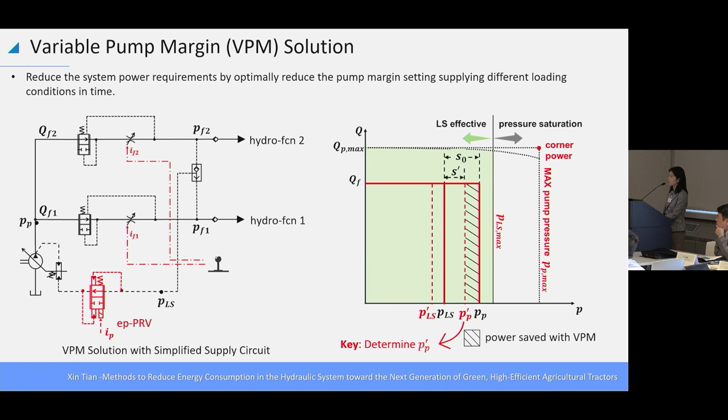However, the difficulty and the challenge here is how do we determine what pressure to be lowered at different operating conditions? That means different flow rate conditions and different loading conditions. The VPM has been implemented in the reference tractor, and overall we're achieving a percentage of power saving on average of 6.7%.

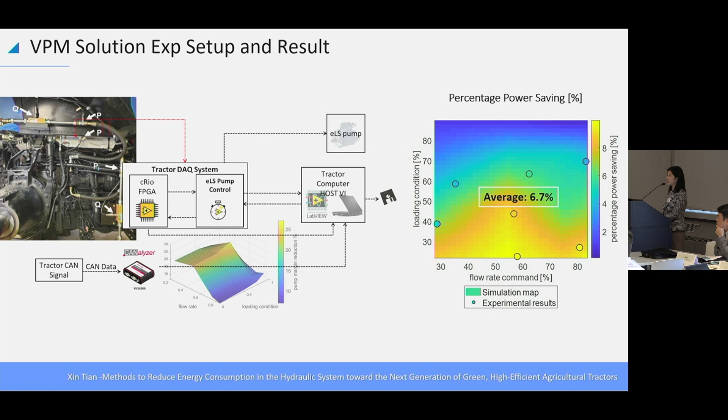The novelty and contribution of this work is that a mapping lookup map has been generated under different system flow requests and different loading conditions, for the system to read and then control the electronic load sensing pump accordingly, just to have the optimized control for different conditions.

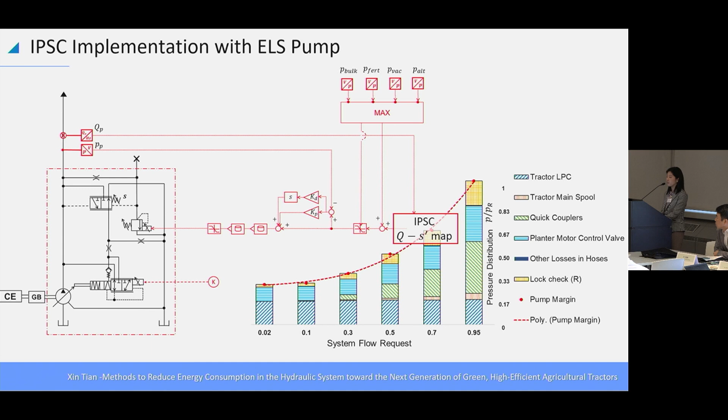And further, 12 in-lab stationary tests together with 55 field tests at Purdue Farm have yielded that IPSC can save 33.7% in mechanical power consumption and achieve fuel rate reduction up to 6.5% under different conditions.

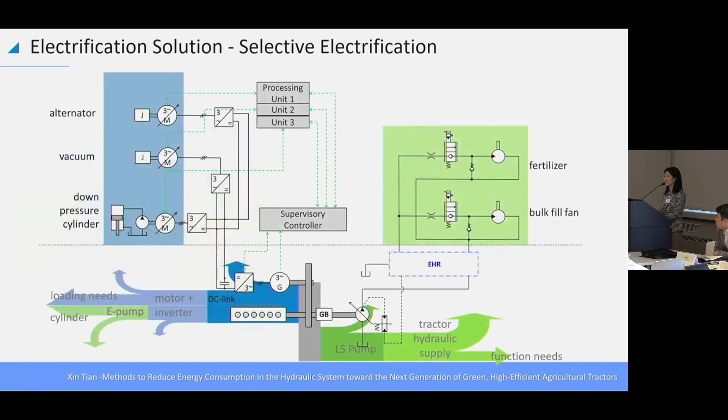And finally, before I conclude, I'd like to briefly give a flavor of the electrification solution proposed in this PhD work. The idea is that we're still going to use a generator, then connect it to a rectifier and to a converter. The final decision shown in this plot is that, using a pure mathematical and analytical approach, we decided...

...that the alternator, vacuum, and down pressure cylinder are the 3 choices to be electrified, while keeping the fertilizer and bulk fill fans still supplied hydraulically as previously. This layout architecture can achieve a 69% mechanical power reduction on the engine shaft.

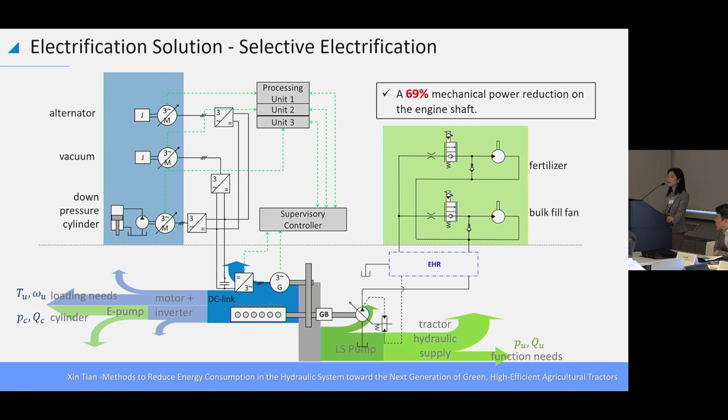Finally, I'd like to wrap up my presentation by highlighting that this research has achieved 2 Best Paper Awards, one being a ASABE 2022 Superior Paper Award, and the other being the Global Fluid Power Society 2022 Best Paper Award, along with 3 journal publications, 5 conference proceedings, and 4 granted US patents, with 1 more to come. With that, I'd like to thank you all for your attention and welcome any questions.

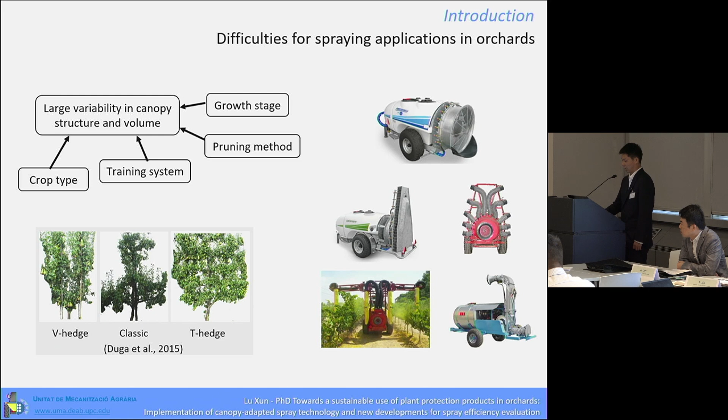This is because of the difficulties in achieving a good application in orchards. One side is that there are large variations in canopy structure and volume. On the other side, a lot of different sprayers can be used. It's not easy to choose a suitable sprayer with good adjustment. The good thing is that many measures can be taken to improve the conventional application.

But when we check the canopy in the same orchard, there are also large variations. To adapt to these variations, new technologies should be introduced to achieve variable rate application with precise application. In this context, canopy-adapted applications can be introduced in orchards. The next issue is to quantify the potential improvements of these technologies specific to the crops and sprays. We should know to what extent pesticides can be saved while maintaining effective biological efficacy. Because of limited time, I will just show the drift potential of the canopy-adapted applications.

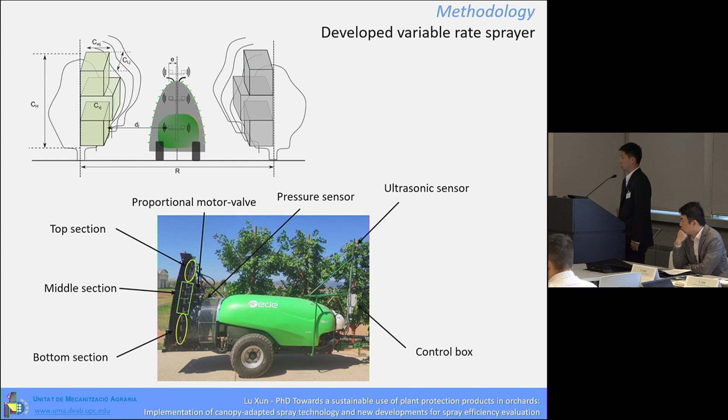Firstly, we developed a variable rate sprayer in our lab based on a fan tower sprayer. The upper figure shows the main principle. The canopy was divided into 3 sections. Accordingly, the ultrasonic sensor was used to characterize the canopy volume, and the tree row volume was used to determine the intended flow rate of each spraying unit. The flow control was achieved by a proportional valve by changing the working pressure.

For the trials, this precise application was compared with a conventional one with a fan tower sprayer and an optimized application with axial fan sprayers. The trials were conducted in an apple orchard at different growth stages. The main difference is canopy density. For the conventional one, the parameters just follow the practice normally used by the farmers.

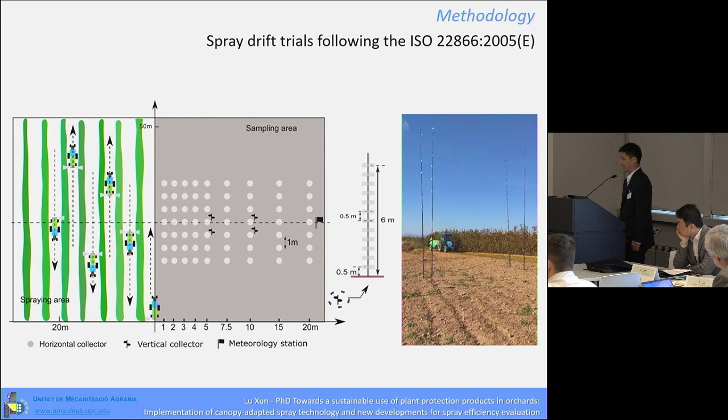For the other canopy-adapted applications, the spray volume adjustment was implemented with a 12% reduction for the optimized application and 43% reduction for the precise application. Also, air induction nozzles were used to mitigate spray drift. The whole drift trials were implemented following ISO 22866 to quantify the ground drift and the airborne drift.

For the results, as expected, for the conventional and optimized treatments, the output volume rate was always constant. In contrast, for the precise treatment, the output volume rate can be changed in real time to adapt to the canopy variation along the tree row. This demonstrates the effectiveness of the developed smart sprayer.

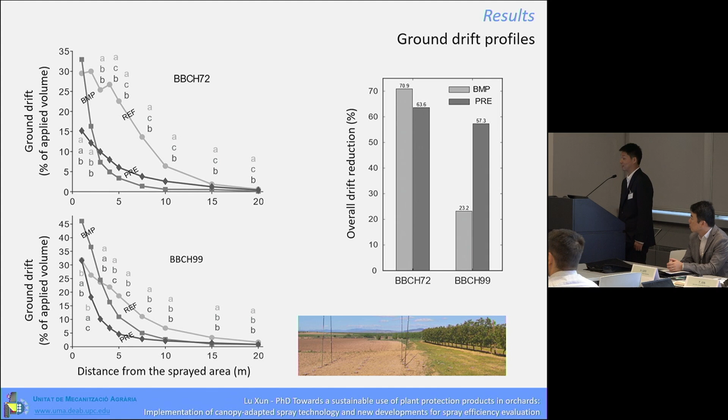For the ground drift profiles, the precise treatment showed good reduction at each sampling distance. However, the optimized treatment failed to mitigate the drift deposition when the sampling distance was close to the treated area. It may be attributed to the difference in sprayer type, because a conventional axial fan was used for the optimized application. Normally, this type of sprayer has poor targetability with a high risk of drift.

For the airborne drift distribution, the 2 canopy-adapted applications achieved drift reduction at almost all the sampling heights. However, the optimized treatment showed a much better drift reduction than the precise one. It may not seem reasonable, but when we check the weather conditions, it makes sense. For the precise application, the wind speed was much higher, and the wind direction was closer to perpendicular to the tree row. It means it has a high risk of drift. And there are also great difficulties to fully follow ISO 22866 to quantify the drift.

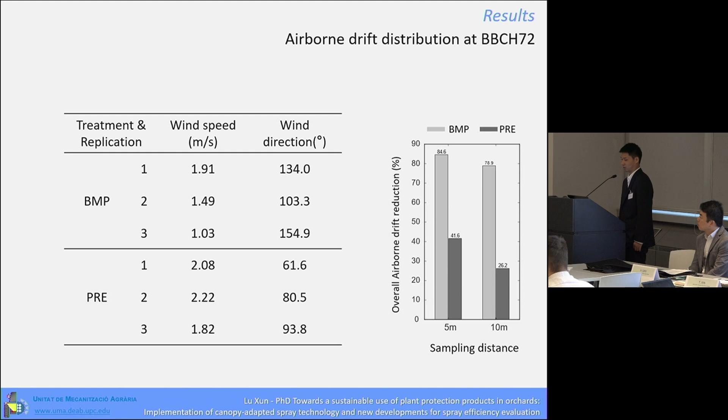For the concluding part, spray volume adjustment based on tree row volume can be an effective way to reduce spray volume. Also, the precise treatment had advantages to reduce spray volume. And there are great difficulties to fully follow the ISO to quantify spray drift.

So it may be a good idea to combine the other alternative methods to quantify the drift, such as the test bench and the wind tunnels. And the calibrated applications can significantly reduce the drift, both the ground drift and the airborne drift. So these applications can be promoted towards a sustainable use of plant protection products.

Also, the sprayer has a big influence on the drift deposition. So when we implement the sprayer adjustment, the sprayer type should be highly considered to achieve a high spray application efficiency. That's all. Thank you for your attention.

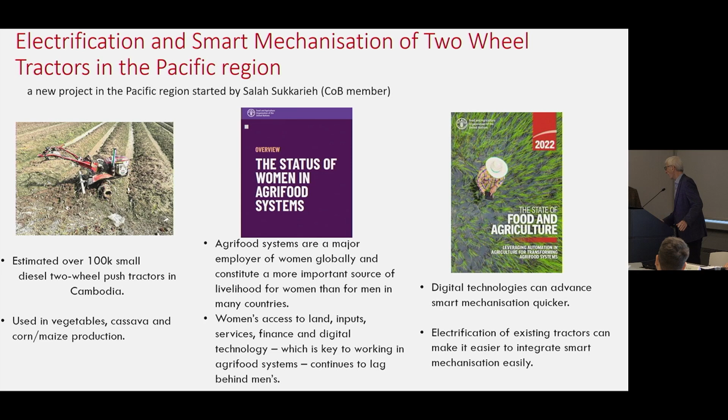Thank you. Thank you, Joseph. Thank you very much for the work done and still going forward on these important topics in the study group you are chairing in such a good way.

So now we go to the closing, where I will first summarize the decision taken during the last management committee meeting. You know that inside the club we have internal rules, and during an online meeting in 2021, we agreed in the management committee that the present president and management committee members end their mandate this November. This means it is the last Club of Bologna meeting managed by the present management. Following our internal rules, FederUnacoma has identified the new president, Danilo Monarca. Danilo.